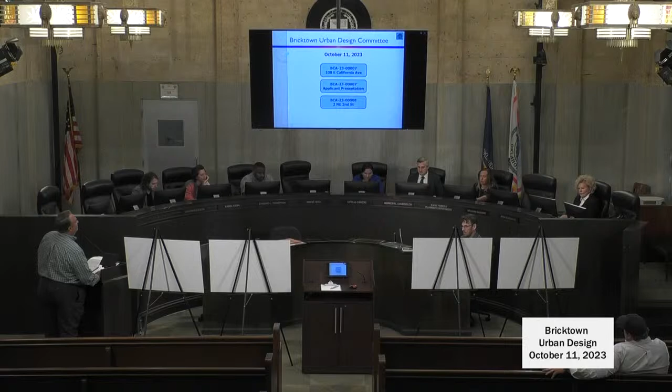Cases withdrawn, none. Continuance request, none. Consent docket, we have none. Cases for individual consideration. Michael, would you like to tell us about these cases, please?

Yes, thank you, Madam Chair. This item is BCA 23-00007. It is located at 108 East California on the south side of the Bricktown Canal, just east of Oklahoma Avenue. This application before you today is a little bit different than anything the committee's seen in quite some time. I've been here on staff for over 11 years, and there's only been one other case I can think of since I've been here that proposed a new building on the canal, that being Brickopolis.

So what you have before you is a significant proposal for a new hotel, a boutique hotel on the south side of the canal. In addition, the other thing that makes it a little bit unique is that it's a combination proposal for a demolition and/or addition. The reason that's been done here is because there are guidelines contained in the Building Conservation and Rehabilitation Guidelines that the city and the Bricktown Committee has adopted that would apply to the addition that would make it pretty impossible to comply with those guidelines given the proposal you have before you now.

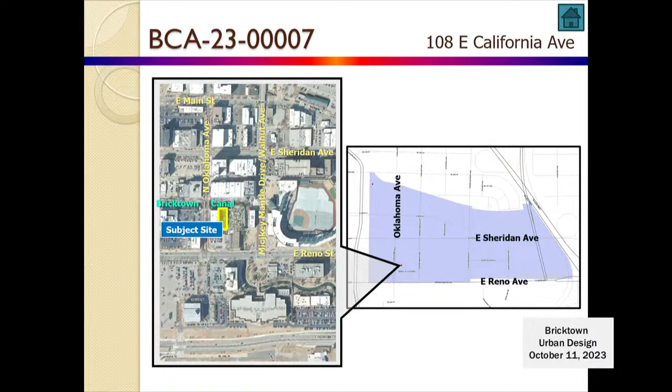The other issue comes from the Building Conservation and Rehabilitation Guidelines, regarding whether they add on to the existing building or demolish and rebuild. The guidelines call for replicating significant architectural features in either option. On the east side there's not much to replicate since it's a big concrete block wall, but on the north and south sides there are minor features that could be replicated with some work in the new architecture.

On the north side, there's a parapet wall at the top of the second story that could be recessed or protruded slightly to replicate that feature. On the south side, there are loft-style warehouse windows facing Wanda Jackson Way. For the first two stories of the new building, whether an addition or a full teardown and rebuild, we feel there's an opportunity to at least match the look of those windows on the first two floors, then change for the floors above.

So in conclusion, with all these issues and loose ends we don't have a lot of answers to, we felt it appropriate to recommend a continuance on this item. The date we've chosen is the January meeting, which is an extensive continuance—open for discussion between the committee and the applicant. We made that recommendation for three months because of the number of items to resolve.

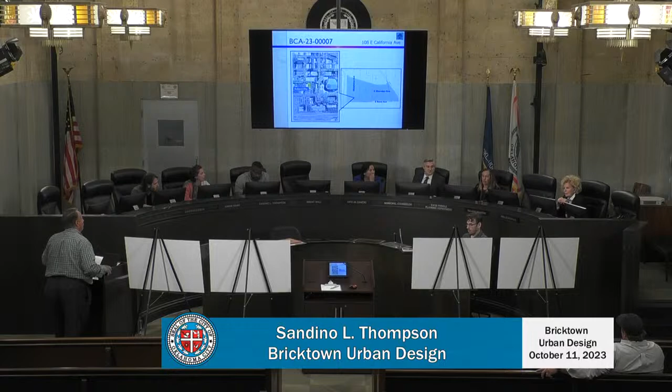Could you clarify for me on air rights? Is the same rules and regulations applicable to air rights? That's what we don't know. It's not our responsibility to coordinate with Public Works to figure that out. We've encouraged the applicant to make contact with those departments to work out whether the extensions they're proposing are feasible, and if so, under what standards. At this point we've had no contact from any representative of Public Works or Parks and Rec. I know of very few instances in Bricktown where air rights have been purchased by the property owner, but that is not what has happened here, or we haven't been made aware of it.

I'm talking about in past years. That has happened? We don't know if that's happened. It wouldn't surprise me if it's feasible or allowed, but allowing it is one thing, making sure it complies with whatever regulations or concerns those entities have is another. We haven't had that coordination yet.

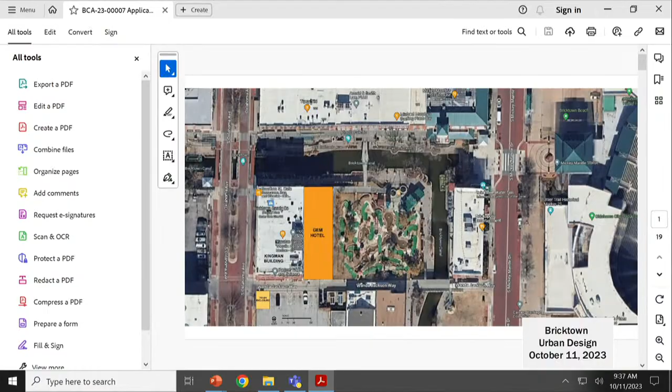Our building's parapet line for the 2nd floor would be somewhere in this area. So it's a little bit hard for us to keep that existing brick, which is really painted. We're trying to maintain some type of identity or take one element and make it part of that precedent, but it's so hard because the building is in such bad shape. There's really no design elements that are very significant or that pop out aside from your parapet, and even that doesn't really stand out in a way that we can say here's something we can use as a time capsule.

Did you want to go through your presentation? That's all right. No? No. Okay.

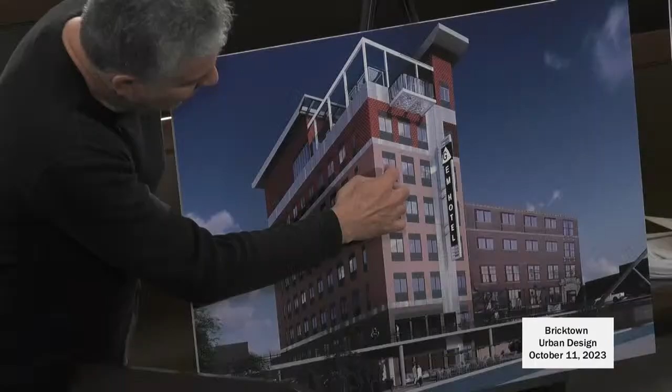Any comments? Yeah, I have several. I wanted to make sure I understood a couple things. When we're talking about materials, it's maybe easier to look at the posters you have. So on the bottom, we're saying there would be brick at the canal level and the 1st floor. So then on floors 2, 3, 4, 5, and 6, what is that material? It's that brick right there. Okay, all right, I just wasn't sure because I couldn't tell.

So then once you get up to, I guess, the 6th floor, is that where you're proposing the metal panels? So the 7th floor and then the 8th floor.

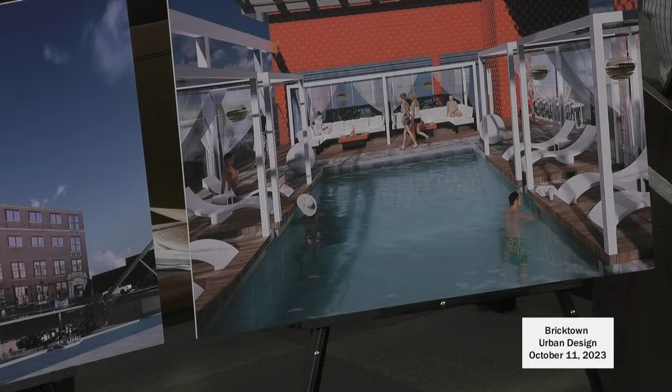The 8th floor is where we have basically the presidential suite, about 1,000 square feet, which faces south. And then we have a fitness center which faces the north part of the building. And then you have the pool, the infinity pool with the lounging area, the cabanas, and also an outdoor bar area. So those two would be this metal panel.

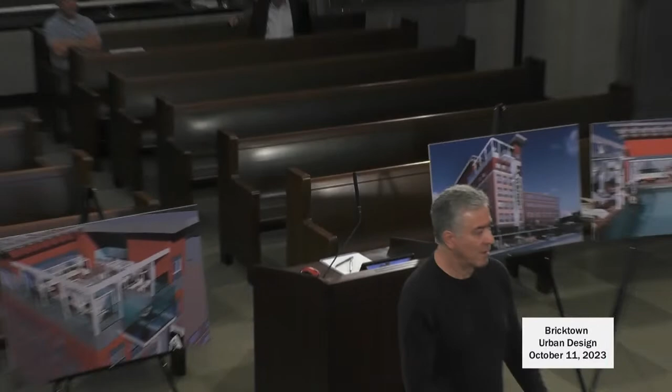Yeah, got it, okay, that helps a lot. So I do want to jump in and say that the packet in front of you has two options for this brick and metal combination. The applicant's preferred option, option A, is to have both the 6th and 7th floor clad in the metal material. We suggested to the applicant that might be a little too much for the committee, so option B, also in your package, has just the 7th floor in metal, with floors 1 through 6 in brick.

And what you see, these bands running vertically and horizontal, that would be this metal panel, which is kind of the same tile size.

Okay, thanks. So then also, can you speak to the material for, I guess it's the 8th floor we're at now? So those other structural members, is that glass? And that metal you're referring to, would that be painted metal? Yes, this is painted metal. I guess, is that part of what was submitted in the design as far as those materials? Yeah, the items we have as white are tied back to the windows, which across all the buildings in Bricktown have white frame wall windows frames. So we wanted to play off of that and tie that in, and these are all part of the structural frames that hold up the railings, the glass bottom on the top roof level.

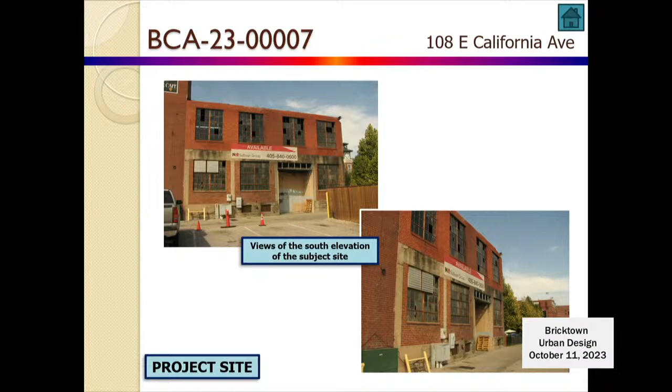No, I understand. So what I will say, because I want to quit talking, that's the challenge for me - because the context of these existing buildings and of this neighborhood is a warehouse district. So it's adaptive reuse, and the reason for my comments is even Brickopolis, for example, really worked hard to give a nod to the community, but that was new construction on empty lots. In this case, we're destroying something that exists to build something on top of it, and there is, in my opinion, no nod to the historic fabric of what was.

And I totally understand that. I think our turning point was 2 days ago when we got the structural report from the engineers. So first, let me address the functionality of the building. It's not a warehouse - the layout of the window openings does not comply with our units for the hotel. There's a rhythm that goes for all of the windows for the units, right, and then there's a lobby entry point.

Then how do you screen the lobby area from the alley, right? Right now we have a trash enclosure in front of us, we also have mechanical right across the alley from us. So a lot of those functions in the lobby - we want to make sure it's attractive and we pull the clientele in architecturally and functionally, right, but we also want to screen them from different things.

I mean, you still have homeless coming in and out of that alleyway, right? So some of the, then on the level above that, that's where you start having the suites, right? Yes, I absolutely understand that.

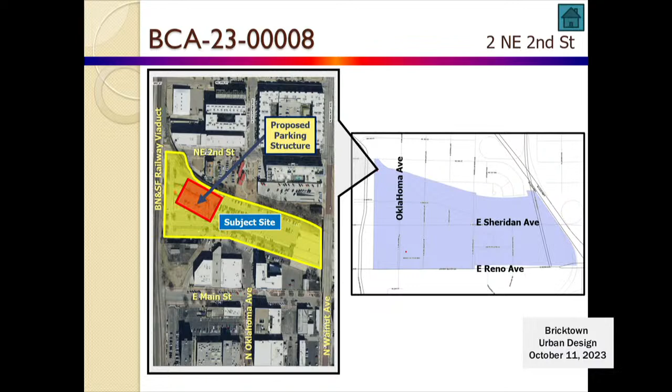Do we have a representative of, or the client present? Applicant present, sorry.

I'm Scott Dedman with ADG Blatt Architects, and we have visited with Michael a couple of times on this.

The whole concept of this garage is really for it to not look like a garage with brick on it, but to look like a repurposed warehouse. And so that's why you see a strong front facade, and then as you turn corners, it's more utilitarian, and you see the concrete framework with some brick infill. So we've been really intentional about how we've designed that.

And that kind of goes with that open side as well. I brought some sketches like Michael was talking about with the half-height screening, and we can consider that. But we really like the feel of having that variety when you turn the corner and it opens up, and I mean, it is a warehouse. It's a warehouse with cars in it, but it's open. And when you look across, it just provides a more open facade.

And frankly, in our opinion, it feels better. So that's really the main thought. So we have brought brick samples and things like that too, if you want to see those. But it is a brick that's been approved in Bricktown as well. So happy to answer any questions.

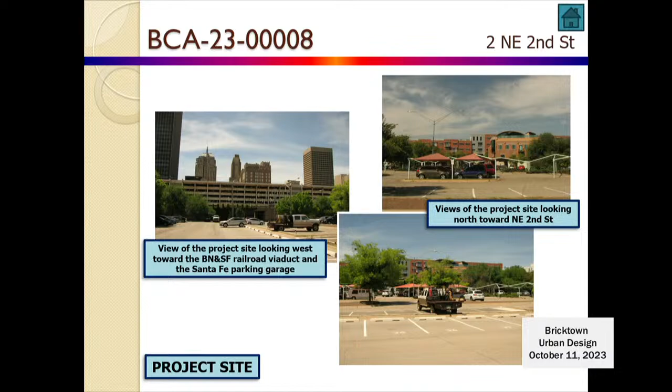I think we are tied because since there is a view from the street on Second Street, we are tied to that regulation that we have to follow. I think we would argue that it's an insignificant view. Most of it is screened off. So if there's any view any place, is that where it kicks in? That seems somewhat onerous. If that's the interpretation, that's the interpretation.

Jim or Scott, can either of you speak to this image and to how high we would be seeing the building? I know it's a little difficult looking at this because it's not squared to the street. It would be kind of coming in at an angle. The reason it's not square is because of the easement that has to be in there for the potential future railroad line.

I think it's even in the third page of their attachment where they've put in the trestle so you would see what the view would really look like on the third page of the attachment.

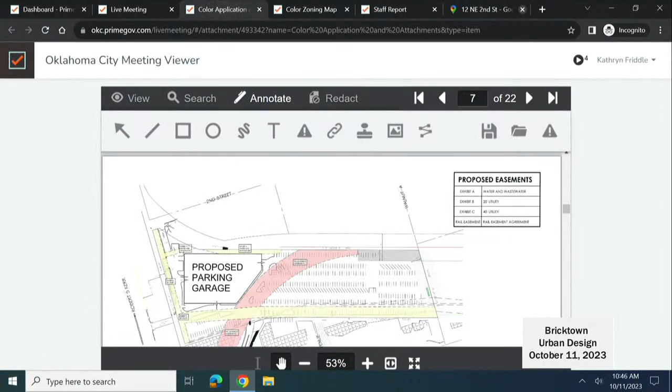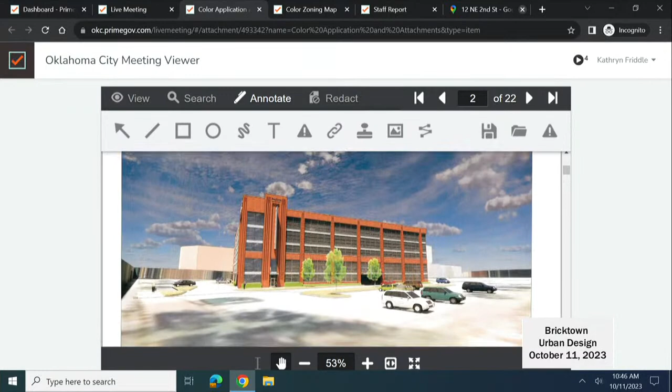So unfortunately, per the guidelines, it's visible from the street because of the height and the transparency of the trestle. That's where we're tied, where it is a street level view that the guidelines say to screen. And I would suggest - at the back end, Katie, sorry - oh, in that document, okay.

I would suggest really trying to be expeditious, because there are instances where I understand what this regulation on the parking garages is trying to obtain. I also understand what you guys are presented. So I think right now it's procedural. If we approved it as is without anything else, it sounds like you would then still have to go and resubmit for a variance. That would take more time. That's what I think is the interpretation of the staff and the counselor's office, not ours. I just want to make sure we're doing the right thing.

We can give a recommendation from you all to be allowed to have the variance then. I know that would be fine, just extra steps. Well, and Scott, to your point, I think there's many instances of this when you're trying to do construction. Sometimes it's form over substance. And I think we're all just saying we like it just like it is, we just don't want to all end up in trouble because we didn't follow a rule. Sure, no, I understand.

So it's really not the committee that - we're bound by rules and regulations, that's all. I think staff doesn't want to put the committee in the position where next time a parking garage comes in that does not have adequate screening and that is not well-designed, that you've kind of gone down that path of being more squishy on evaluating the visibility and that sort of thing.

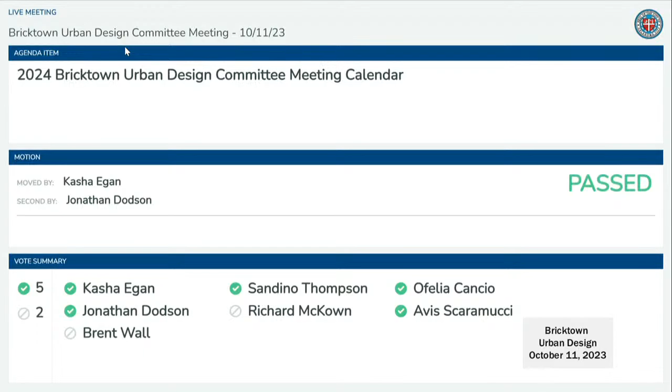And you all lucked out and did not have any weird holidays that adjusted the calendar. No, you don't have to do any funny stuff to your calendar next year.

The next item is item number 8, communications. Is there anything you would like to share about the administrative report, Michael? Well, other than the fact that this report reflects the same level of activity we've had at the committee level. For us to be out of operation for 9 months, the first 9 months of the year, and have only 8 administrative approvals is a pretty slow level of activity.

But it's all pretty much your standard, some signage and various things that are pretty minor, and they're all in compliance with the standards that apply in Bricktown. So that's why they were approved administratively by staff. I think the last one on the list here, 06, was probably approved by staff maybe back in July or August. That's how slow it's really been.

So we were really excited to see these 2 items that you had on your agenda for you today. So that's really about it. And we haven't honestly had much in the way of anybody else talking to us about submitting anything else in the near future either. There is one

project that they're talking about on the north side of the canal that is a renovation of an existing building. I'm not sure if it's Chelino's or the building next to that, but there's somebody out there. It's got their brain working on some projects out there, but there's not a lot of activity.